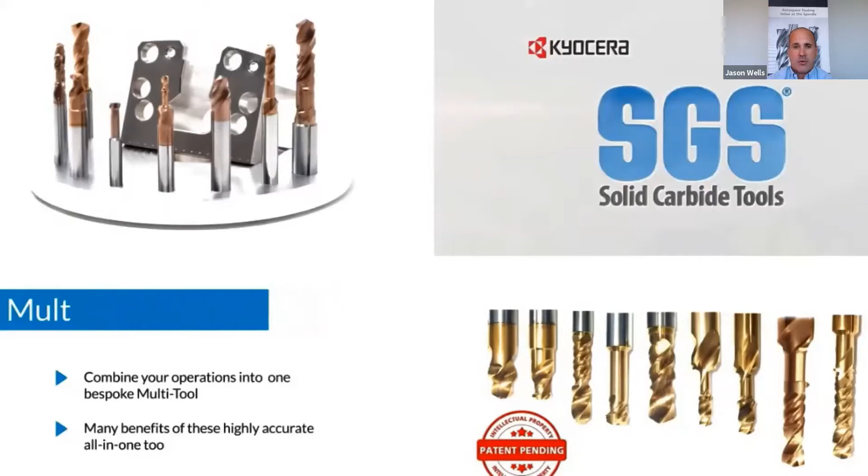What my division focuses on is special tools and engineered solutions. And the topic I'm going to talk about today is multi-operational tools or combination tools, where we try to really engineer a solution by combining multiple operations into one tool platform or one tool. I hope today to really enlighten you and help share some information on advantages this kind of strategy can bring to your operations. I'm going to break this topic down into 4 distinct areas.

The first thing I want to look at is it always comes down to dollars and cents. So we'll talk and discuss about the cost of machining so we can understand how combined tooling is going to influence that. We'll then look at machining a feature. What do we do? How do we approach it when we get an opportunity? And how do we decide if combination tooling is going to be ideal for us to pursue?

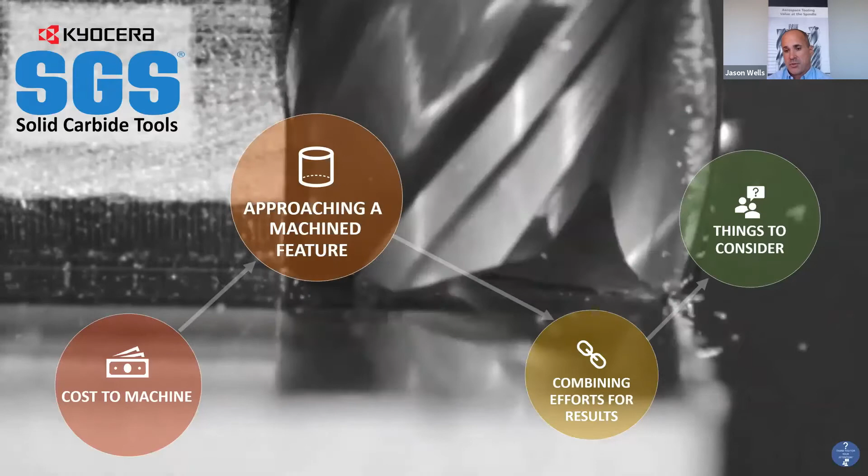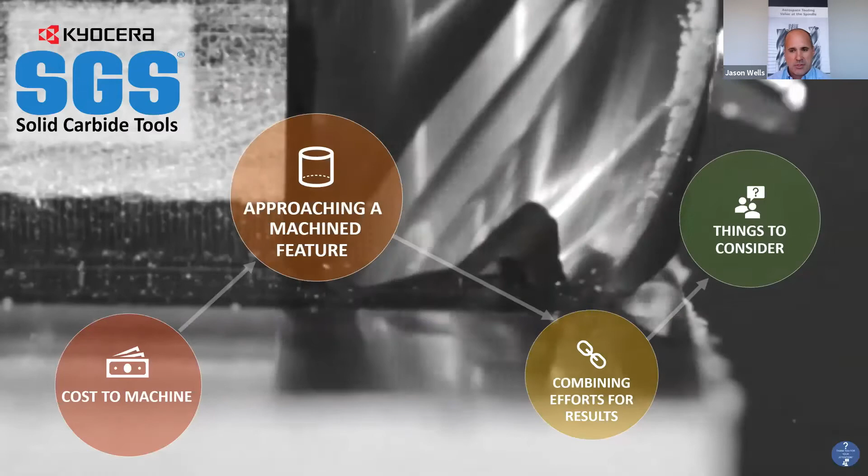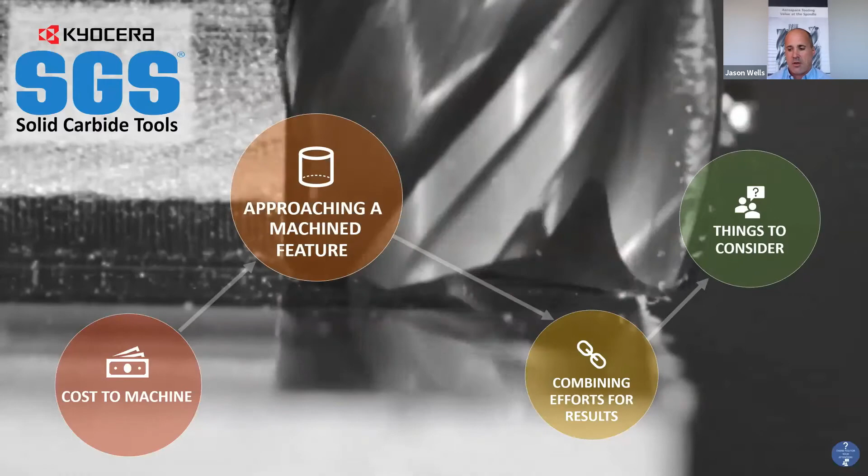Then we'll look at how, by combining some of those geometries into one tool platform or combining some efforts, we can maximize our yield and maximize our results. Finally, we'll talk about things to consider in deciding if we want to go the path of combined tooling. Obviously, this is going to really lean towards advantages in combined tooling, but I do want to emphasize at the end that it's not a cure-all for everything.

So let's first look at the cost of machining, and we'll break this down into really 3 areas. It's certainly all about the profits, but we'll look at how combined tooling can really help us seek out profits. What are those areas that it really addresses that helps us maximize our profits and maximize our yields? We'll then look at the cost of machining, the equation of the cost of machining and how that breaks down, and then how the tool itself can impact that cost equation.

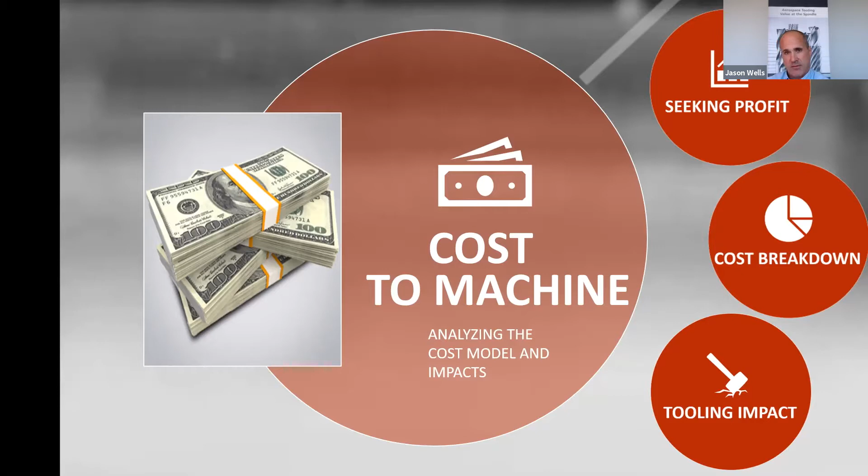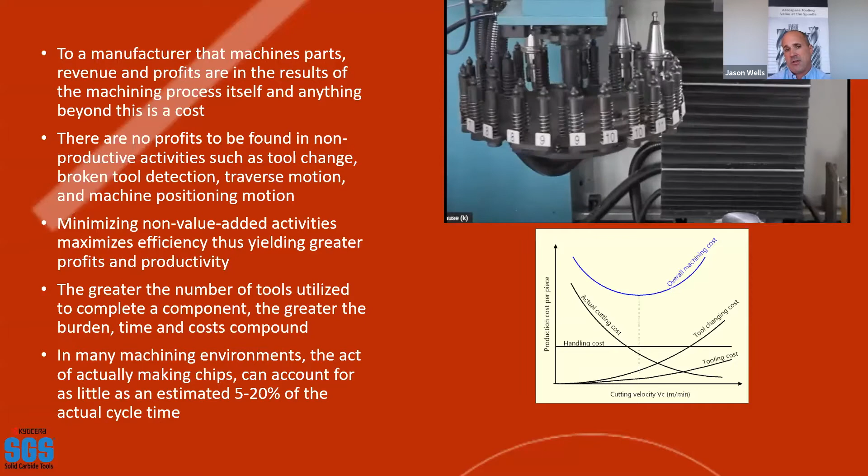So when we look at it from a profitability standpoint, the manufacturer of machine parts, it's all about the revenues and the profits, and that revenue and profit comes in that end product that we're manufacturing. Profits are made in the process itself, and anything outside of the manufacturing of that end component that we're going to sell to our customer is just a cost. There's really no profits to be found in any kind of non-productive activities.

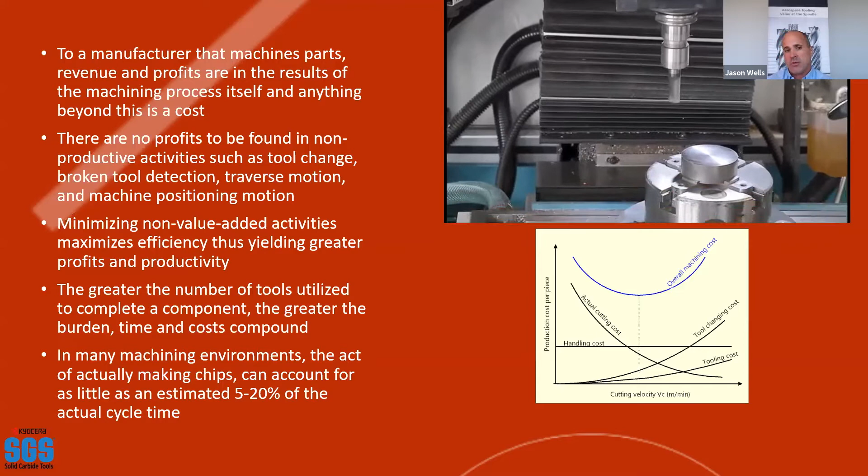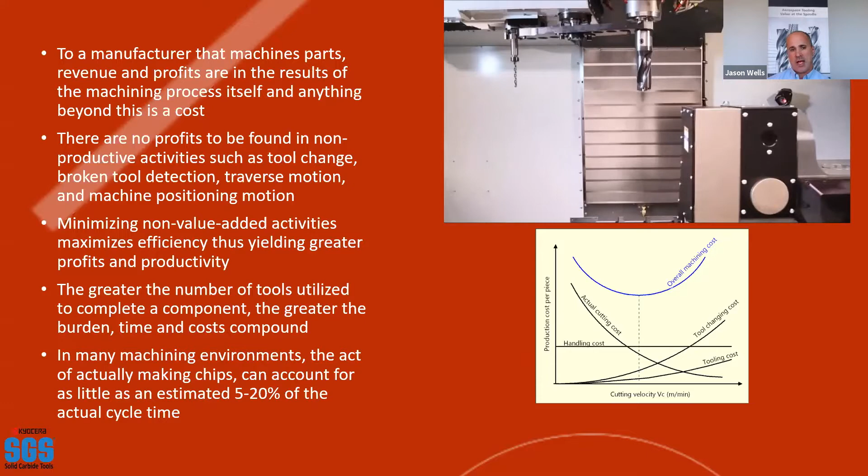This is really what we focus on a lot of our effort when we try to design solutions or engineer solutions is where can we really eliminate or minimize non-productive activity? What I mean by that is tool change time or detecting broken tools or probing cycles or just general traverse motion inside the machine. We want to minimize that activity so that we can maximize our yield in regards to profits and productivity. And what we find in a lot of applications is the greater the number of tools that we utilize, you can imagine that this just compounds the burdens and the cost and the time in that machining environment, thus compounding the cost of creating that component that's going to be then sold back to our customers.

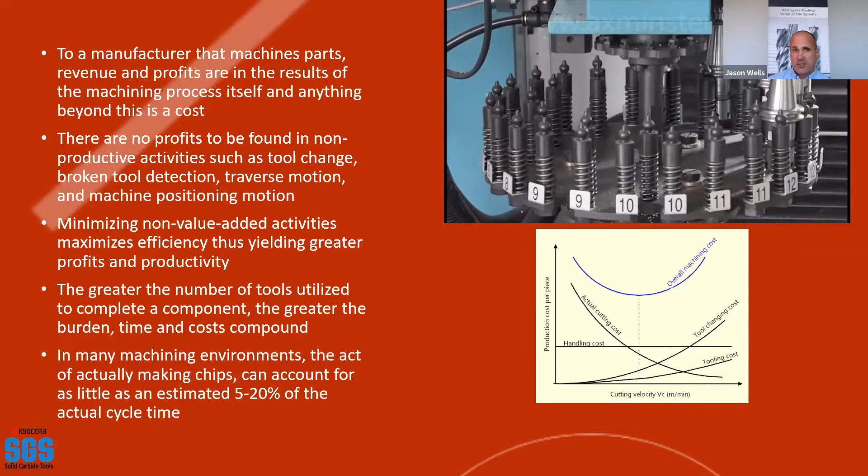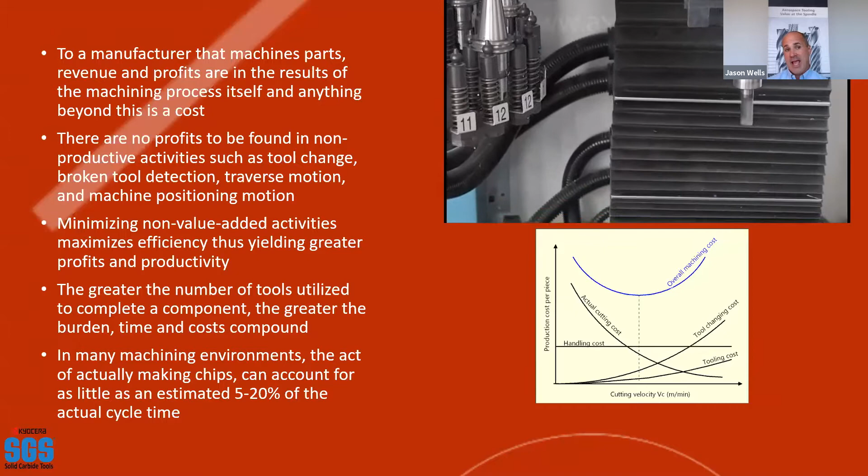In a lot of machining environments, the actual act of making chips or manufacturing that part can account for as little as 5 to 20% of the actual cycle time. So for us as tool manufacturers, that gives us anywhere from 80 to 95% of an area we can really focus a lot of attention on trying to reduce and have impact for our customers when it comes to developing solutions.

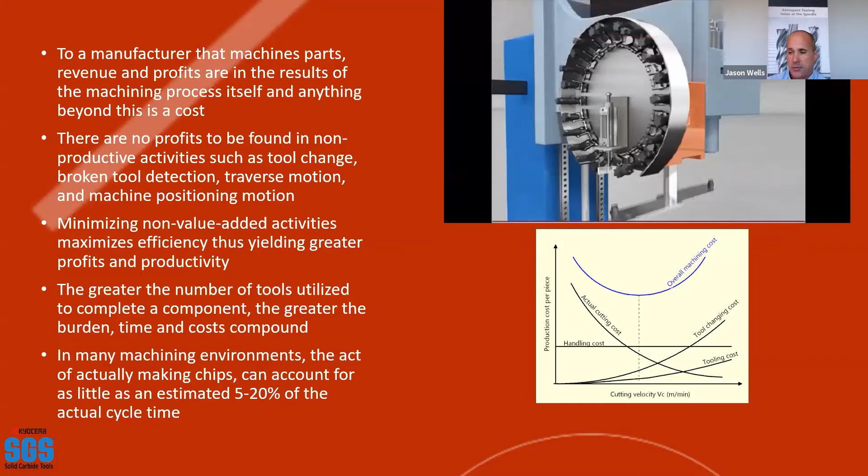The purpose of this presentation is really to share with you how the incorporation of combined tooling as a strategy can really impact your profitability, your throughput, and your efficiency gains.

What we find is, unfortunately, a lot of potential customers and end users want to shy away from combination tooling in their operations, a lot of times due to economic concerns. Combined tooling does fall into a category of special or custom tooling.

As I said in the very beginning, that's what my division focuses on, which is why I'm talking to you about this today - special tools, custom tools, or non-catalog product. And the truth of the matter is they do often have a higher upfront investment or a higher upfront cost for a lot of those special tools.

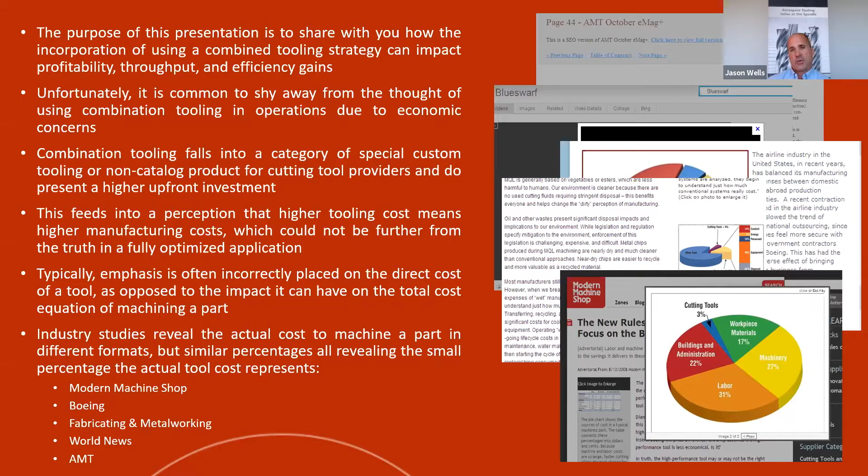Unfortunately, this feeds into a perception that higher tooling costs means higher manufacturing costs. Because tools are perishable in the equation and constantly being purchased and bought, there's this linear relationship in our mind that if I buy more tools, my manufacturing cost is obviously higher. And the reality of it is it's not that cut and dry, not that black and white or linear. In fact, in a fully optimized application, this couldn't be further from the truth.

So we get this incorrect emphasis placed on the direct cost of that tool equaling the cost of our machining process, as opposed to really focusing in on the impact that tool can have on the total cost equation of machining a part.

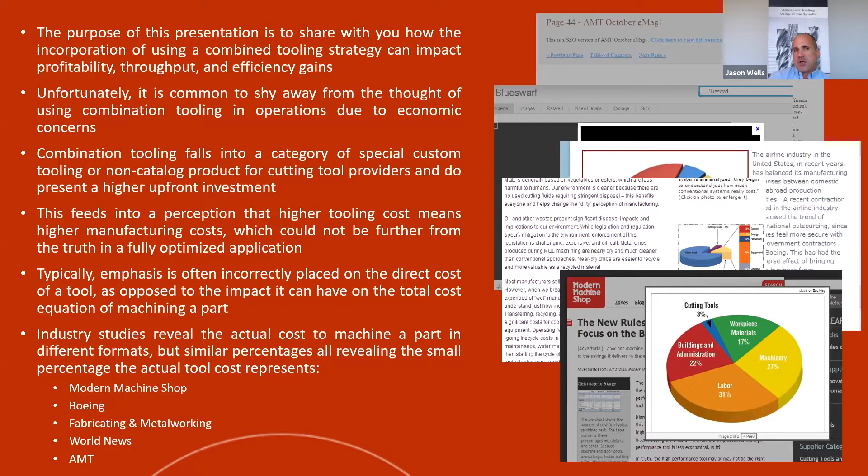There's been multiple studies - I'm sure many of you may have seen them throughout the course of your career and your travels and various trade periodicals - but definitely several industry studies that have revealed and shown the actual cost of machining a component, and they all kind of boil down to about the same equation. We've seen them in trade periodicals, and we've seen organizations like AMT and large companies like Boeing all do these analyses and basically come down to the same end result.

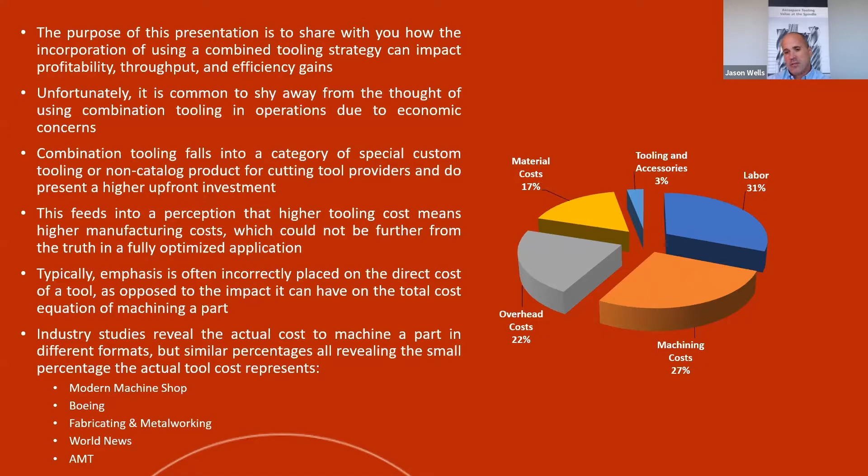This kind of breaks down what we see typically in the machining equation. As you can see, that tooling section of the cost equation, or this cost pie, is the smallest component or the smallest piece of the overall cost of machining a part. I'm sure many of you are familiar with this, but I just want to emphasize this as it pertains very much so to this particular conversation.

So let's look at the tooling impact. Every function that goes on inside of a facility is really geared around trying to get that end product, that product we're selling to a customer, out the back door so that we can get compensated for that work. But every function is dynamic and it's connected, and every function has a cost associated with it as well.

So anywhere where we can produce a savings in that chain of events of creating a product from a quote to a finished product that we're receiving a check for, those savings have a ripple effect back through the whole series of costs associated with our manufacturing and our operations. So let's take a look at the tool, for example.

Our tool can have a massive impact on things like our labor costs. How many times does a tool crib attendant have to possibly touch it or set it? The machinist - how much does he have to finagle with it? The programmer, quality assurance people - those are all touch points that the performance of that tool can have an impact on.

Machining costs are very obvious - tool change time, those unproductive times that we talked about, positioning moves, fixturing costs, our burdens, our overheads, how many tools do we have to inventory, shipping and receiving folks, purchasing activities, capacity, energy consumption, and then finally material - things like scrap, material removal rates.

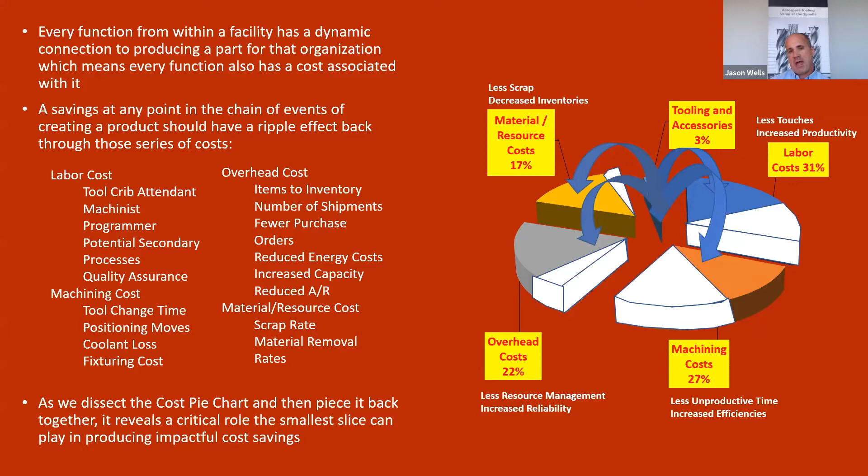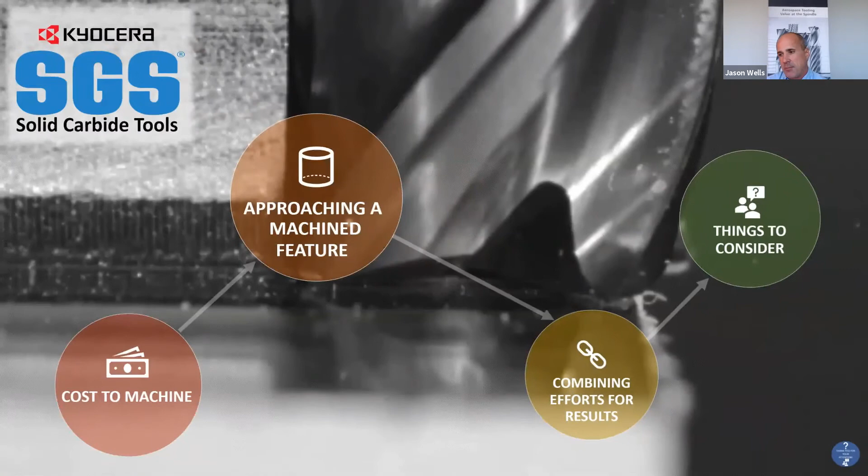So let's take a look at a machining feature, and let's talk about it a little bit. So we get this opportunity to create a component. We look at it feature by feature. We approach that application, and then we define a process around it, and then we talk about our times.

Thinking in a very conventional, straightforward fashion, we start thinking, well, I've got to obtain a tool to create the hole. The hole has a surface finish on it, so I got to make sure I create that finish. I got to create the top chamfer and the back chamfer. As we dissect that and walk through it in our minds, it's very common and easy to just follow the obvious path of, I need a tool to do this, I need a tool to do that, and just kind of step through it step by step, process by process, addressing each individual geometry of that feature as opposed to the feature as a whole.

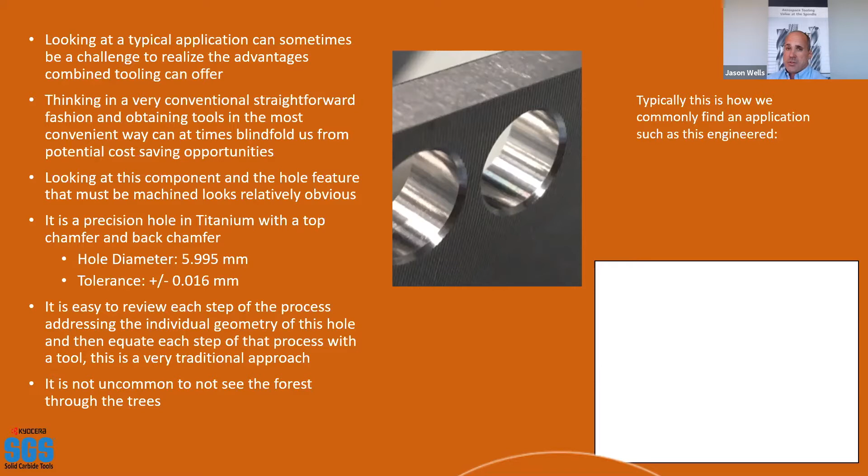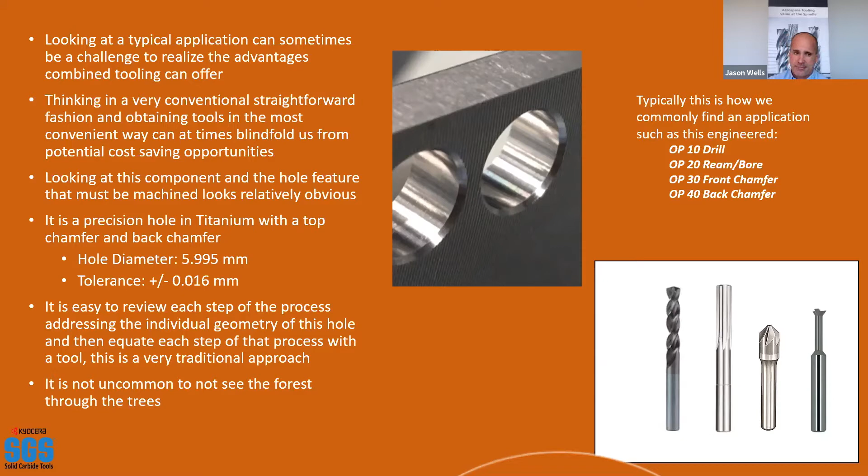It's not uncommon for us to not be able to see the forest through the trees. Again, I want to emphasize that this is a very typical, real world situation that we run into. So we could see, just to create this one feature, where we would drill it, potentially ream it, bore it to get the finish and the size that we need, a tool for the top chamfer, a tool for the back chamfer. A very common way to process this particular application.

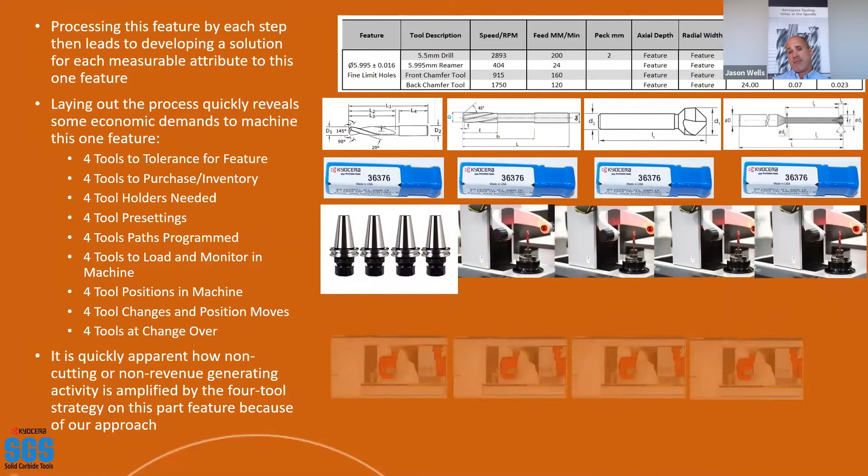So as we kind of dissect it that way and we start laying it out and putting it feature by feature, now all of a sudden we have to address each one of those pieces of each attribute or each piece of geometry within that feature.

So we create our process sheet, we figure all that out, and now all of a sudden we start laying it out and realize we've got 4 tools. We have 4 tools that we have to source. We have 4 tools that we have to make sure that tolerances are cohesive with each other and going to work well together. We have 4 tools to purchase, 4 tools of inventory, 4 tool holders to hold these tools, 4 tools to set, 4 tools to program, 4 tools to monitor tool life, performance, get the right balance of speeds and feeds. We take up 4 positions in our automatic tool changer.

We have 4 changes, position moves within the machine environment itself. And then finally, it's 4 tools for our operators, our machinists to set and to handle inside that machine environment itself. So as we kind of break it down and lay it out and visually look at it in that perspective, it quickly becomes apparent how all these non-cutting or non-revenue generating activities get amplified or multiplied as we add tools to the application, add tools to the scenario to machine this particular feature on this part.

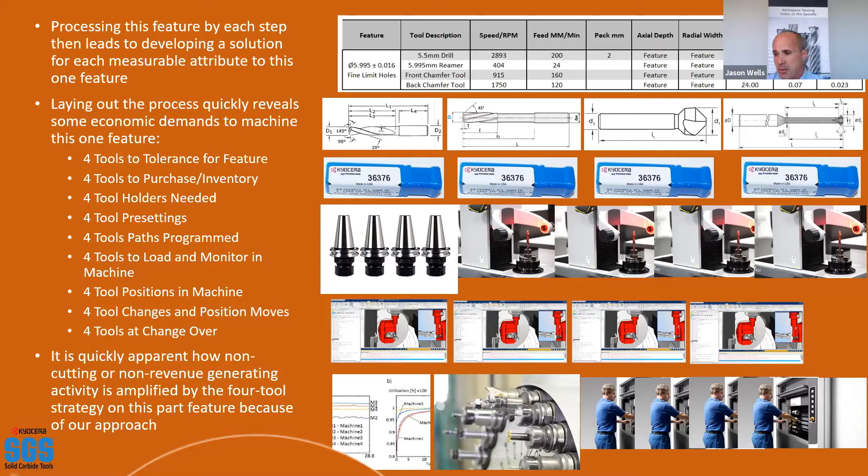So beyond the obvious cost to support 4 tools, all the resources that are going to be needed to support those 4 tools, we also have to look at it from a time standpoint. So each one of these tools has got to be able to move into position to remove their small piece of material or their small feature, their small piece of geometry within that one feature.

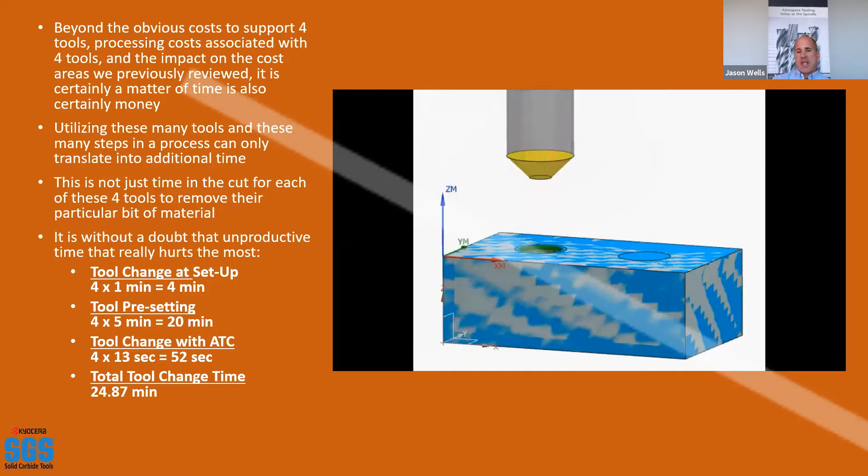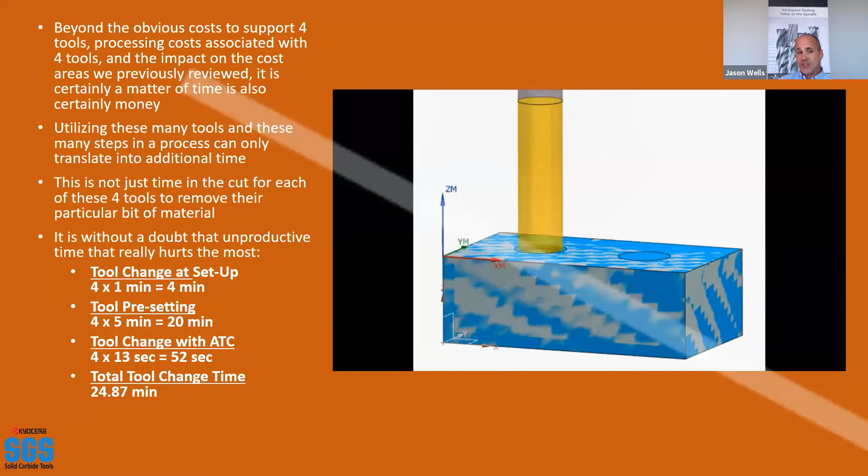So as you look at it here in this simulation, as you can see on this particular slide, as we add tools to the steps or add tools and steps to the process, it's only natural that that translates out into time. It's not just the time of actually cutting and removing material, it's all that other motion that we really want to try to eliminate and get out of the way. Again, that 80 to 95% that we really want to focus in on.

So just talking about getting the tools to the workpiece before we even actually remove material, we can see a lot of time, and how it multiplies as we add more tools into the application. For example, let's say just to swap out the tools, it's a shift change and your operator, your machinist has to take the used tools out and put new tools into your ATC, your automatic tool changer. Let's just say it takes 1 minute to do that, times 4, now you've got 4 minutes.

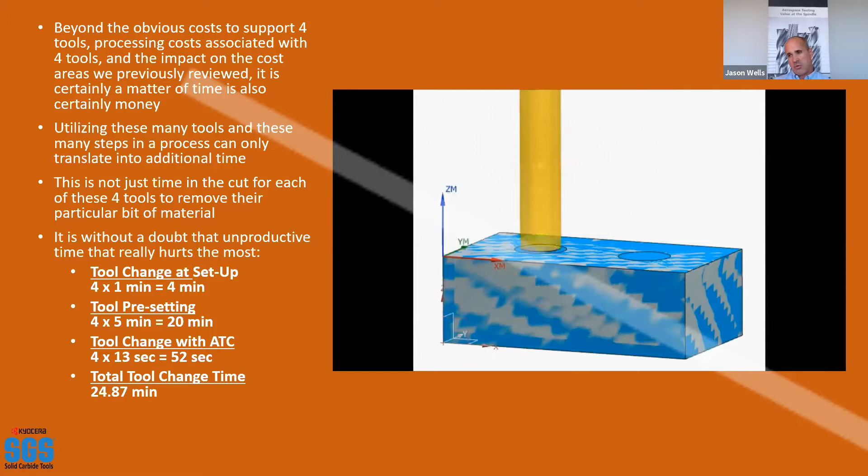Then you got to take those used tools out, put new tools into holders, set them, measure them in the presetter, set everything the way it's supposed to be set so it's ready to go back into the machine. Say 5 minutes per tool, multiply by 4, now we're looking at 20 minutes. Then inside the machine itself, moving into position and swapping out in the automatic tool changer, let's say 13 seconds per tool. So when we add all that up and it compounds, we've got nearly 25 minutes of touching, managing, messing with that tool just to get each one up to the workpiece to do what it's supposed to do from a metal cutting perspective.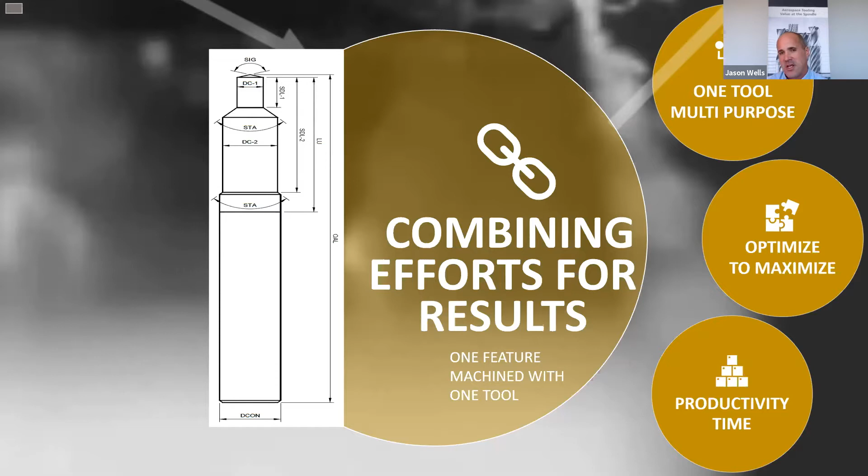So let's look at how we might be able to gain some efficiency. Let's talk about how we might grow a better strategy by using a Swiss Army knife approach of one tool with multiple purposes, how that may optimize to help us maximize our yields, and how that's going to impact our productivity and our time.

So one of the ways here, or to potentially work with our end customers, is we try to start sometimes looking at the whole or the feature from a different angle or a different perspective.

What I mean by this is sometimes we start with what's the end goal and work our way backwards. I like to use the analogy of proofreading a paper. You can write something and read it a million times the same way and your brain skips over mistakes. All of a sudden, if you change the way you read it, even the setting you're reading it in, or read it backwards, or skip around on pages, errors start to jump out at you.

It's the same with the application. Sometimes we have to look at it totally differently and force ourselves to find a better path of profitability.

One of the ways we start off on whether we want to consider combination tools is when we're given an application where it's one feature. Like I said before, that was just one hole. Yes, it had chamfers, but those chamfers were part of that one feature. So if one feature is being addressed by multiple tools, that's usually a really good starting point for us to ask: it's one feature, can we do it with one tool?

That's kind of the approach we try to wrap our minds around as we start going down that path. It's not as if we were drilling the hole over here and creating chamfers on a whole other part position. It was all congruent, all geometry that flowed together. So there should be a way we can approach that with a one-tool strategy.

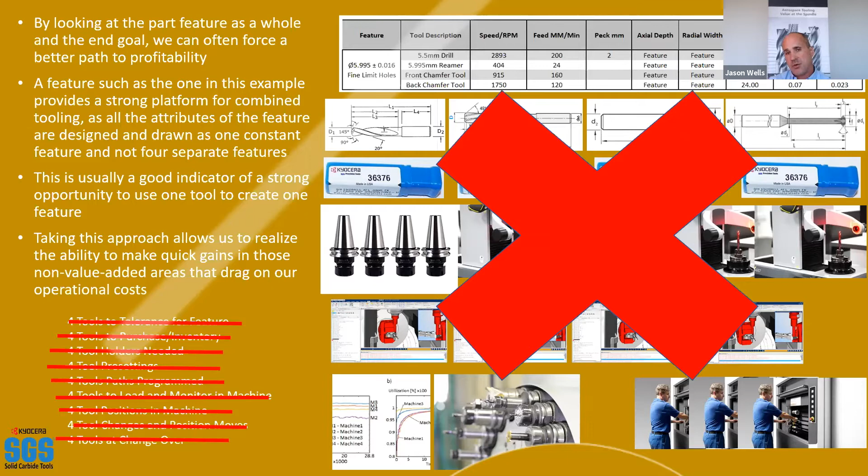Then as we start to look at it, if we can do this with one tool, how's that going to impact our non-value-added activities, those activities that really drag on the operational costs of our business? You can see on this screen the original quick-gut, traditional, conventional approach, but that's not the way we want to go. You can see how much was involved with that.

Now let's look at doing that one feature with one tool. It's going to create those 4 aspects of geometry. We're going to create the hole, finish it to size and surface finish requirements, create that top chamfer and that bottom chamfer, but do it all together, all as one.

So what that does is give us the opportunity to have one tool to tolerance, one tool to worry about how the tolerances all fit together, one tool to purchase and inventory, one holder, one tool to preset, one tool to program, one tool to monitor for loads and forces, one position in our automatic tool changer, which is great for any kind of lights-out operation, one tool that has to position itself and move within the machining environment, and finally one tool for our machinists and operators to manage right there at the machine.

So just saying it out loud, just seeing it on paper, you can see the amount of variables we've removed that could potentially go wrong in a series of events by trying to condense it down into a combination tool strategy.

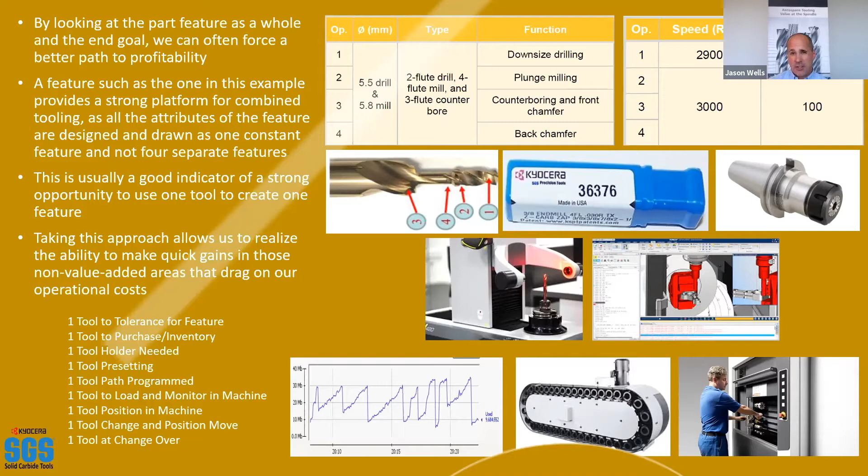So now that we realize all these other costs and the impact, and how we can really streamline touches as something moves through our facility, and the different points that have the potential for cost savings to ripple back through by minimizing those touches and that motion.

Let's really look at it from a capacity perspective, because it's not just the standpoint of what's happening offline outside the machine, but also what's really happening in the machine. So we have one tool that's able to create all those features, all that geometry together in one motion inside that machine. Now all of a sudden we gain capacity, we gain time, and we minimize and start to have a massive impact on that non-cutting, non-productive motion going on inside of our machining environment.

These gains are incredibly valuable, more valuable to us in many ways than just not having to buy 4 tool holders or set 4 tools offline, because now we've gained the ability to take on more work. We've gained the ability to quote more aggressively on some lead times and things of that nature. So it becomes a lot more about working smarter, not so much as working harder.

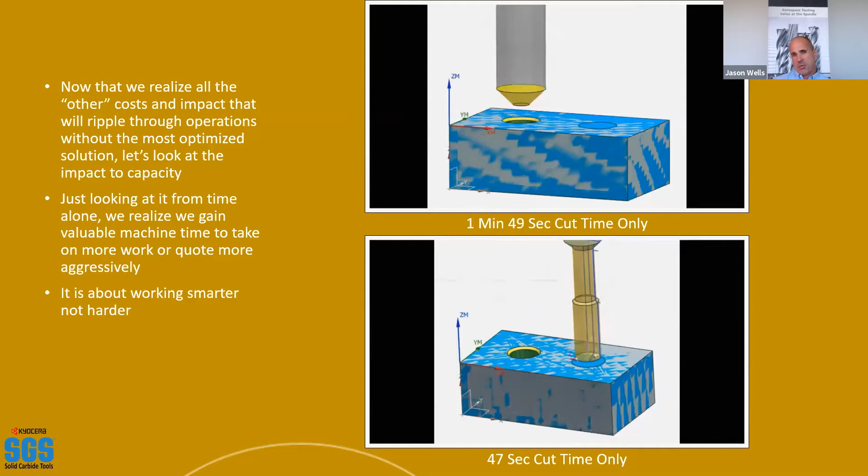We get into a lot of situations, and I'll show you some later on, where customers call us in and really all they want to do is speed up what they've already had, and we're able to re-engineer and reapproach so that we can try to approach things a little bit smarter to try to maximize those savings.

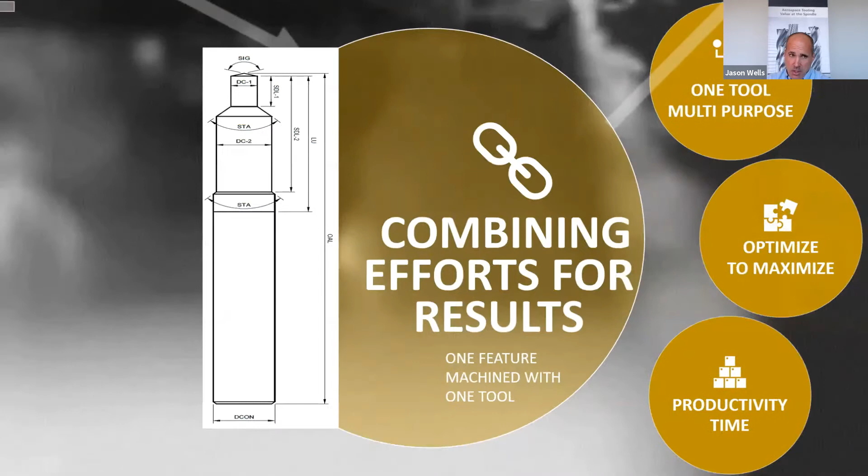So as I mentioned before, this is not a made-up scenario. This is a real-world situation, and it's not an uncommon one either. You saw the simulations in the previous slides. Now I want to show you actual video of a tool similar to this concept that we've talked about in action.

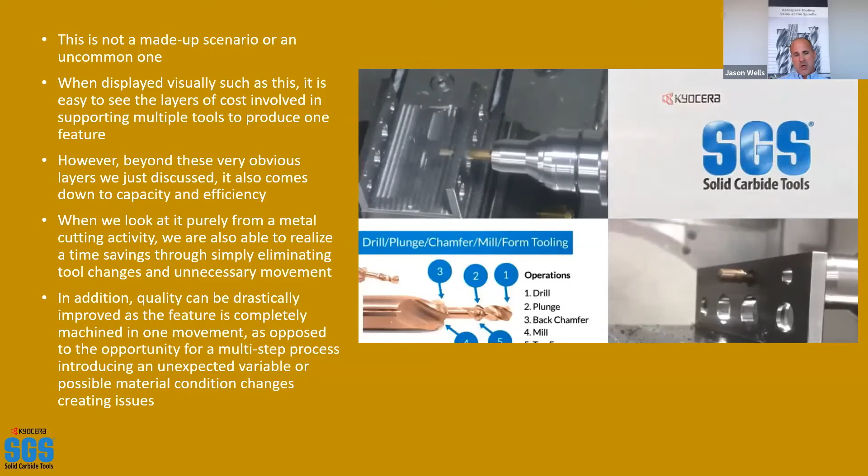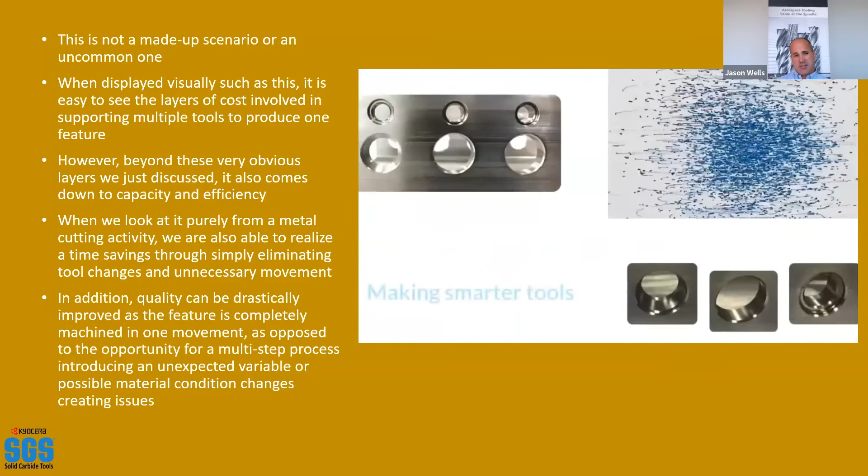So when we display it visually, you can see the layers of costs that are involved in supporting multiple tools. We saw the layers and all the touches with all the holders and the inventory and the purchase orders to get all 4 of those tools together, and all the space and touches. But beyond these obvious layers that we've discussed, the real impact comes down into capacity and efficiency, gaining that capacity to take on more work, gaining efficiencies to grow your profitability.

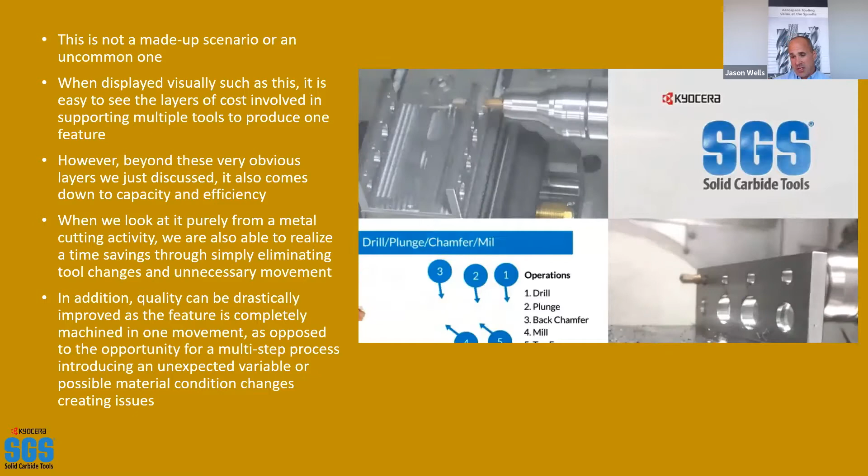If we look at it purely from the metal cutting activity itself, not talking about all the other outside peripherals, we realize tremendous cost savings, again attacking that 80 to 95% of non-cutting activity that's estimated to happen inside that machining environment with unnecessary movement and tool changes and things of that nature. So as you can see from this video, the feasibility of this, but also by combining those operations, not just the feasibility of that one feature, but being able to do potentially multiple features.

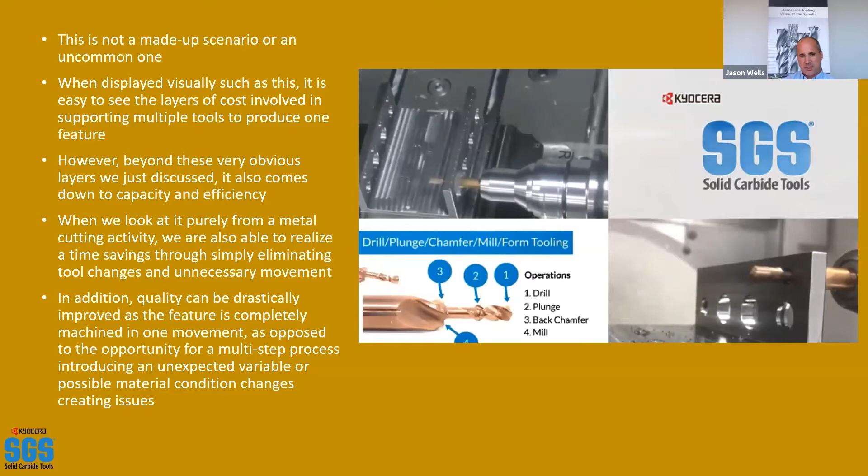One aspect that also is nice with combination tooling that I'd like to mention is quality aspects or quality opportunities to help drastically improve certain situations where we may have complex features with tight dimensional tolerances. There's an opportunity there for us as tool makers to do all the heavy lifting for you and put it into the tool geometry itself.

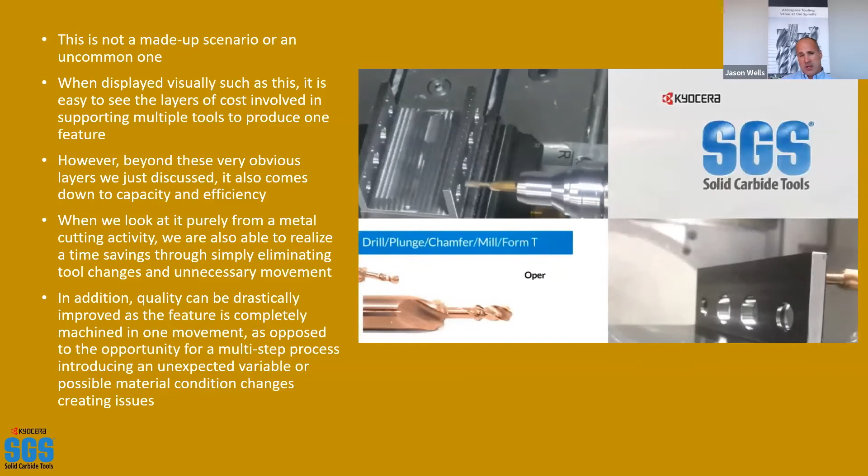Also, with a multi-step or multi-tool operation, we have to worry about sizing tools that follow other tools. We have to make sure we're leaving enough material, not too much material, and whether we've changed the condition of the material for the tool that's going to follow. These are all variables that we're layering into the application, and these are all points that could potentially go drastically wrong for us, unfortunately.

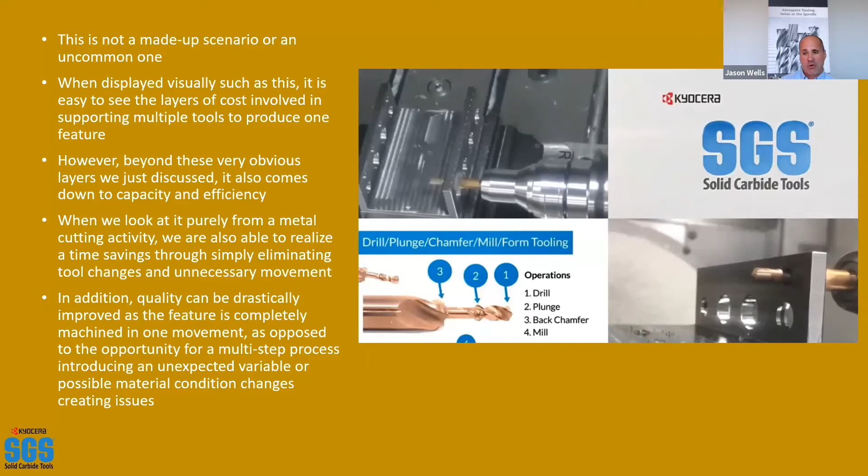So, as I mentioned earlier, the tooling is the perishable part of this equation. It is why it gets a lot of attention and is a focal point when it comes to machining costs. Hopefully what you're seeing now through some of the slides that have built us up to this point is that it's definitely more complex than that, more layered than that. I think only equating my cost of machine to the tool is very one-dimensional, and it's much more dynamic, much more complex than that.

To try to help further this point, I wanted to put it really into numbers, into dollars and cents, because at the end of the day, that's what we're striving for: that profitability, that ability for us to grow our businesses and supply our customers.

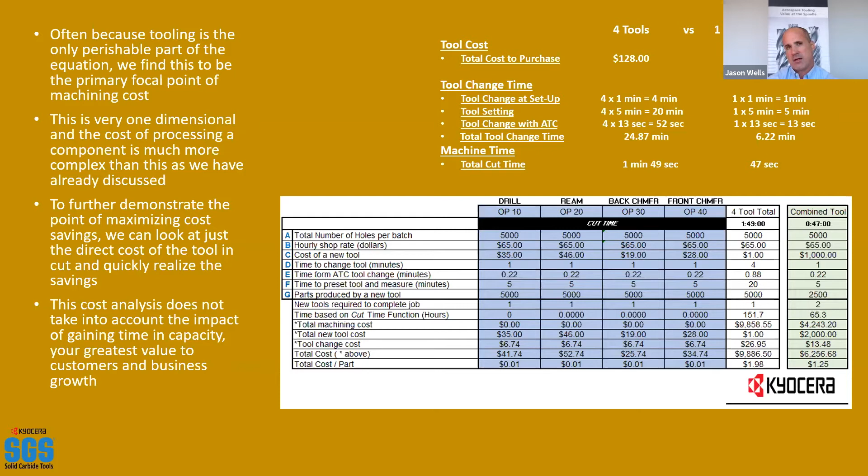One thing I want to point out, and one reason I added this ridiculous scenario, is to show the impact that just saving or going cheap on tools really has on your bottom line. We took $127 off that 4-tool cost—from $128 down to $1—and it only attributed to a 2 cent per part cost savings on the bottom line. So the math reveals what a small piece of the cost equation to machining the tool really contributes.

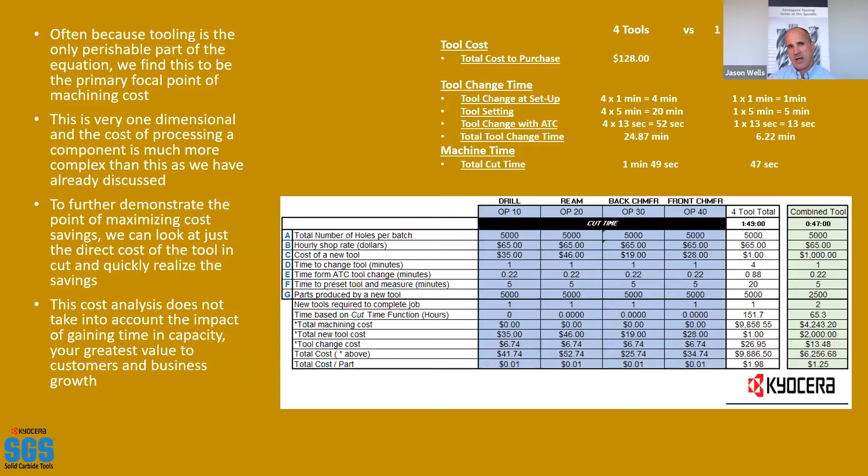That's why it's really important that we try not to get too tied up in the cost of the perishable as it relates to our cost savings.

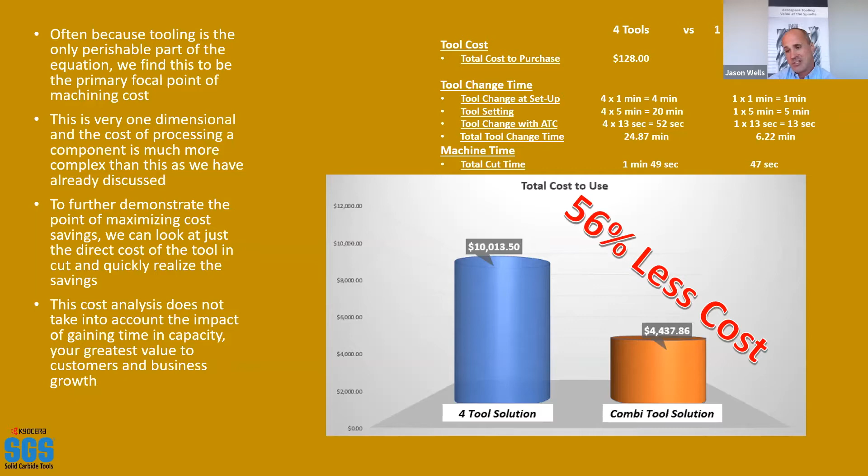In our application with our customer, when we came in at 5,000 hole usage, the cost to use the 4 different tool strategy was just north of $10,000. When we were able to plug in the combination tool and address that whole feature with 1 tool in a very consistent motion, we were able to drive that cost down to less than $4,500—basically creating a 56% cost savings, or 56% less cost.

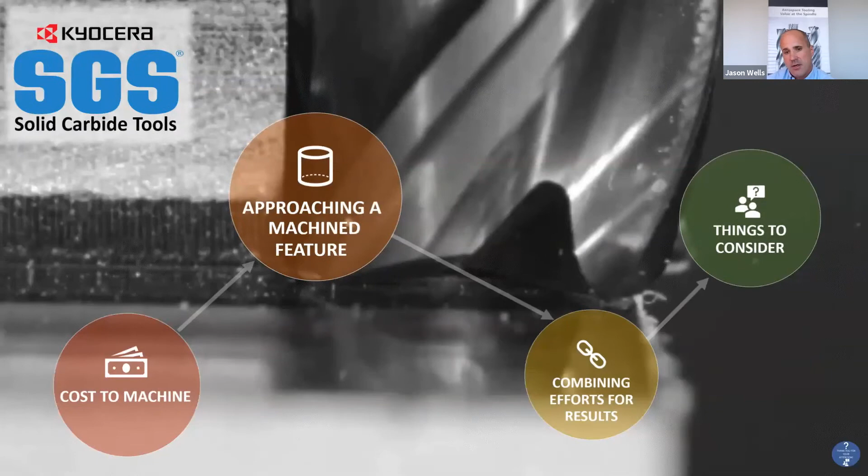Let's talk about some things to consider when we want to move towards combination tooling. The first thing I want to do is share some further application examples. We went through a very simple but powerful example, and I hope you found it's not always obvious that this is a great opportunity to use a combination tool. But I want to show you other applications our company has gotten involved in to really combine operations into one tool, bringing real savings and real impact for customers.

This first example is a grooving tool. This was a customer performing a product on a lathe where they were drilling and then turning a series of internal O-ring grooves into a component. They called us in to help with the drilling cycle, but when we got in there, we found there might be other opportunities.

As we looked at ways to engineer this product, we thought about a whole different way of looking at it from a milling perspective. Rather than doing all this work on a lathe, we put it in a mill, put all those O-ring grooves and that form into a milling cutter, and interpolated the internal features in one motion. This was a massive savings for this customer, who had added a half shift to keep up with demand. We eliminated that half shift and opened up capacity, removing a major bottleneck.

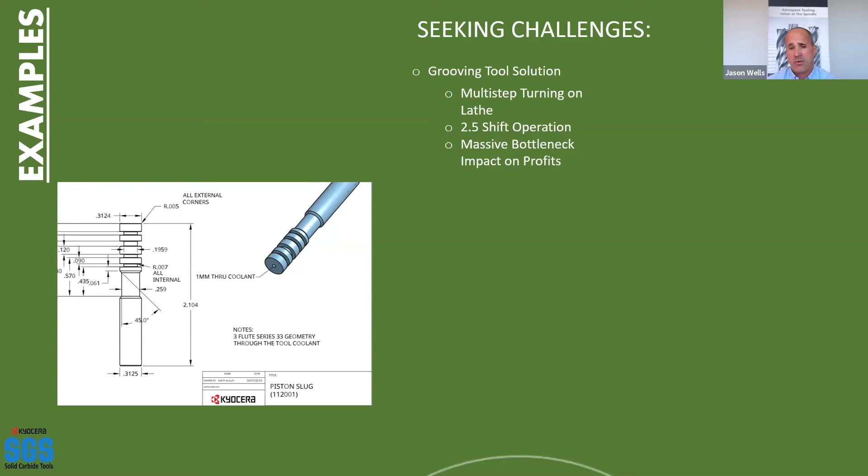In this example, the customer came to us basically asking us to quote what they already had, hoping we'd quote it cheaper and deliver faster. The truth is, we could maybe price those tools cheaper, but that would only have minimal impact, only addressing that 3% portion of the cost equation if all we did was replace brand A with brand B.

So we asked if we could get involved with the project and learn more about it. What we found was that this customer was creating a series of timing teeth. They were using a tool to rough these slots, then coming back with another tool to finish them out and size them, and then using a third tool to radius the top of these teeth.

We looked at the application, used a little bit of a different programming strategy, and were able to rough, finish, and create that top radius all in one motion. We took their cycle time from 30 minutes per part down to 1 minute and 30 seconds per part, a 95% reduction in their cycle time.

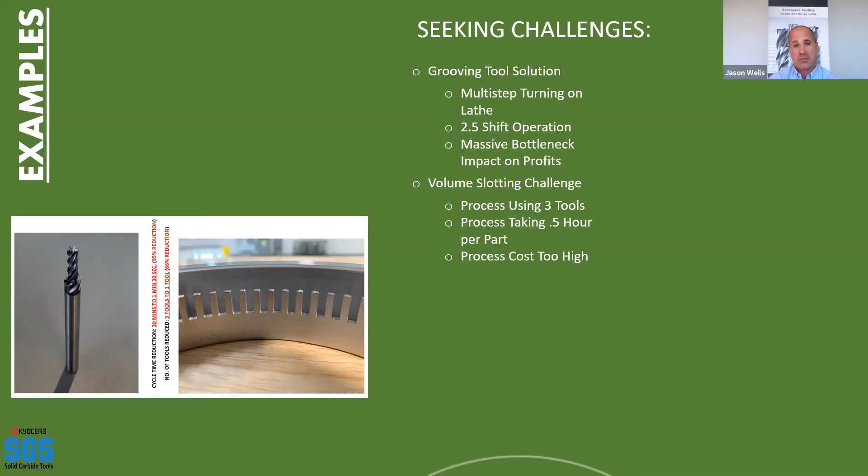So we did a great job of addressing that 80 to 95% I was talking about earlier in that first slide, and obviously reduced their tooling, the amount they had to handle, inventory, and put into tool holders, by 66%.

This was an application where a customer was creating seats, almost like counterbores, with an end mill, then coming back in with a drill to create a hole in the bottom. We got involved because they needed to gain time. They were at risk of losing the job due to cost and delivery issues, and they were also having quality issues with the hole positioning at the bottom and some burr issues.

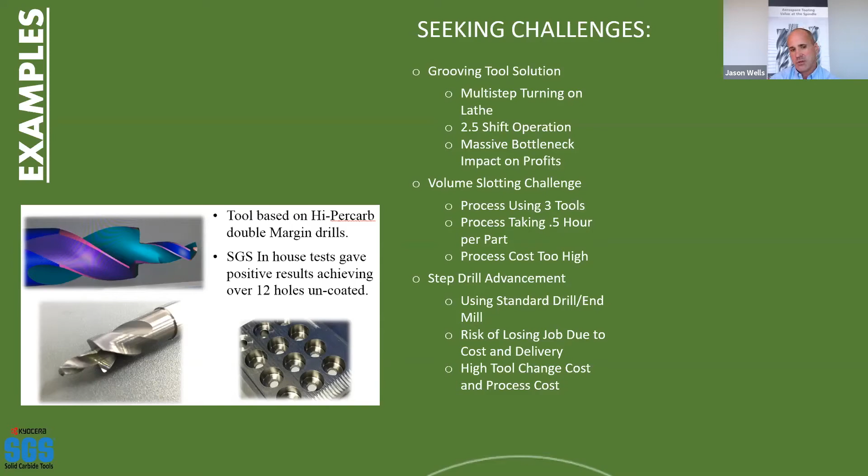Our field engineer was able to get involved, look at the application, and realize we could possibly combine this. This was one feature with different pieces of geometry, but again, going from that whole mindset of one feature, one tool, we were able to create the whole geometry consistently, drastically improving the positioning quality issues and concerns, and address that whole application in one motion.

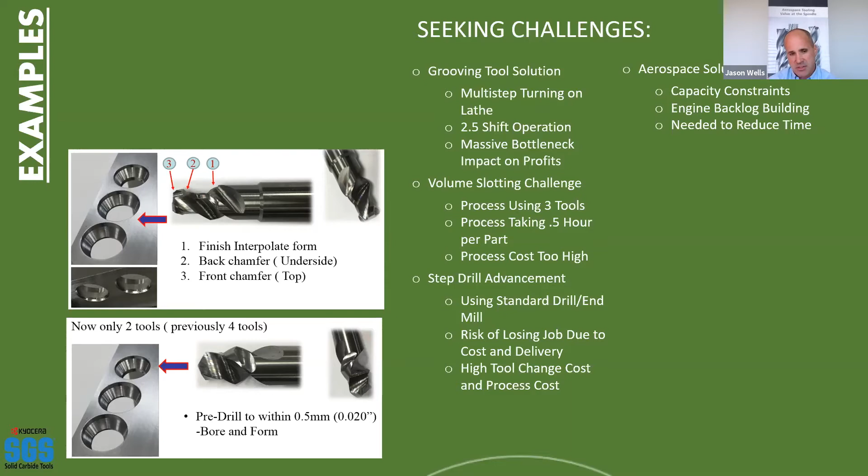This was an aerospace application where the customer was trying to create a hole that had features on top and on the bottom, and also had a form that blended into the top and bottom features. We did try our best to get this into a one-tool platform, but this is where you really have to use the right strategy and make sure you're not trying to do too much with one tool. We ended up having to back off a little, but we were able to take it from 4 tools down to 2 tools. The one thing you have to be cautious of is that trying to do too much with one geometry can cause a quality issue in certain aspects of that feature, so a proper strategy has to be planned out.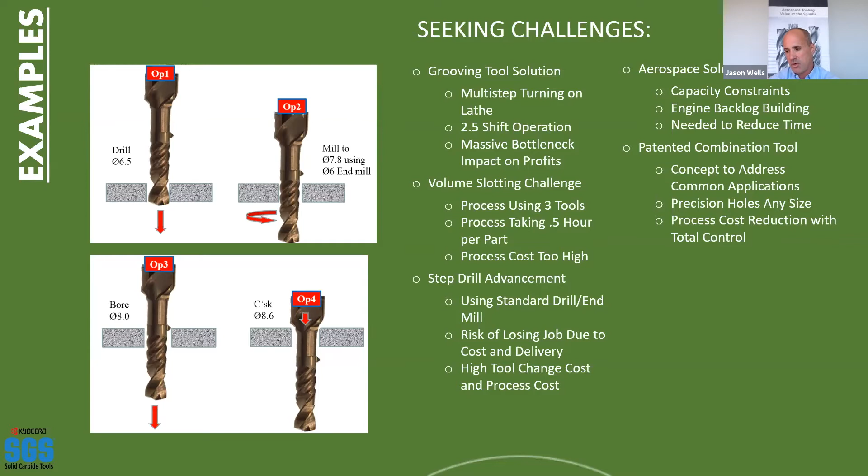This is a great unique tool we're really proud of that our colleagues in the UK developed. We have a tech hub, similar to ourselves, that services Europe out of the UK. It's called KYOCERA SGS Precision Tools Europe. They do a lot of special tools, combination tools, with a highly skilled staff that gets involved in a lot of solution sales. In the process of doing that, they developed this particular tool. We are pursuing patent rights on this concept, but basically this tool will drill, then interpolate mill to size, then precision bore the hole, and finally create a countersink on the top surface. It allows you to create a lot of different sized holes and gives you some process control on precision holes. Our hope is that this tool really allows us to start gravitating combination strategies closer to a standard product mindset. Our UK staff did a phenomenal job on a really clever design we're proud of.

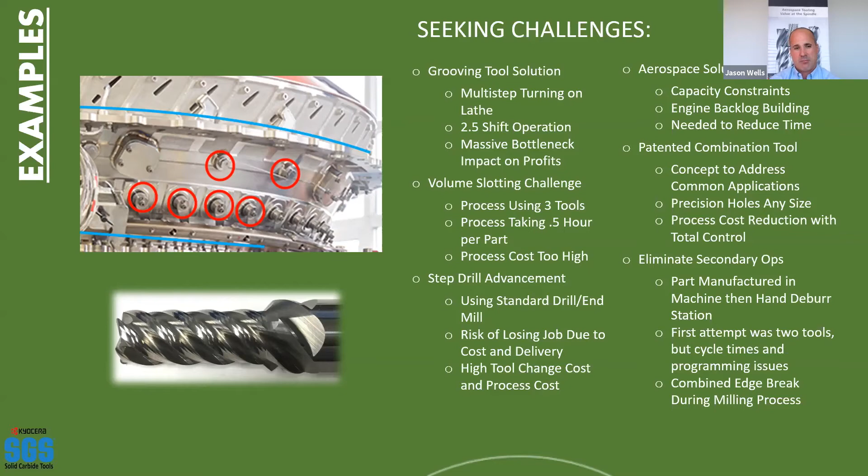This is an application where a customer was machining parts, and the part after machining had to have an edge break or burr removal, which was being done offline in a secondary operation. The customer first tried to do it in the machine itself with 2 different tools, which added a lot of additional probing cycles and time. They were having programming match issues, so they abandoned that strategy and went back to secondary ops. Our field engineer, again on a UK application, was able to see this as an opportunity to work with our manufacturing folks to develop a product that could mill and break that top edge at the same time.

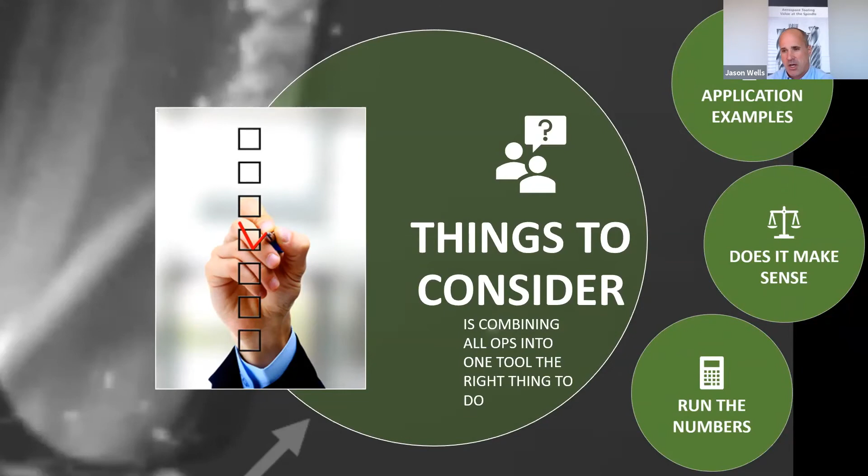So those are just some examples of really pushing, thinking outside the box, looking at things a little differently. But does it make sense to use combination tools? This is where we really have to ask ourselves and dig into the challenges within the application environment.

In machining, we're playing this game of compromise, trying to address whatever the weakest link or weakest portion of the application is, and we have to work around that. It's the same with our strategy on combination tools, that combination tool is only going to function as well as the weakest aspect of geometry within that tool. Whatever the most vulnerable piece of geometry is will ultimately dictate the tool life of that combination tool. So we have to make sure we're getting the proper balance of performance and tool life for our customer, and not trying to do too much with one tool.

A lot of times, as you've seen in the pictures and various slides I've shown so far, we have to sometimes extend the length of the tool out in order to get pieces of geometry or aspects of functionality along that tool. When we do that, sometimes we can run into reach issues when trying to use combination tooling, where we might be restricted by fixturing. You saw some of the tools where we had to reach down below the part, and sometimes we don't have enough travel to get below or beneath the part.

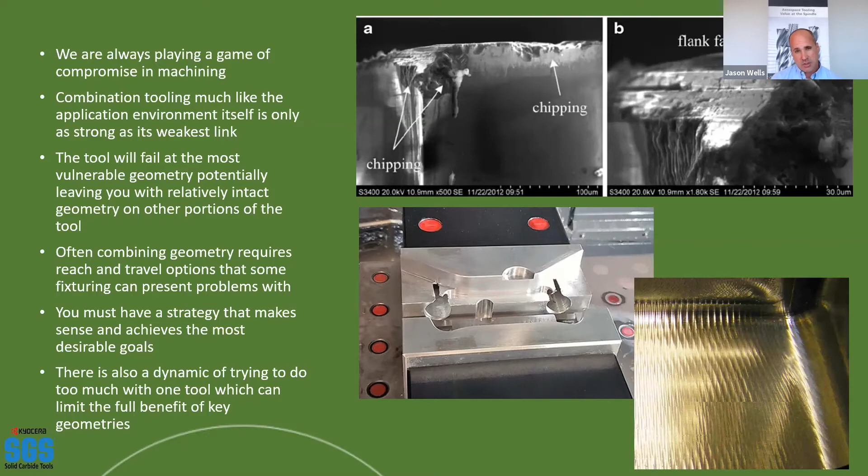Another situation to consider is, as you saw on some of those combination tools, we have to create some necks or thin cross sections to accommodate pass-throughs or going around certain features, and sometimes this can affect the rigidity of that tool. So we have to be cautious that we're not getting too thin or too long, that we're not going to run into a deflection issue that might translate into surface finish issues or tolerancing problems. So as dynamic as the environment is, we have to make sure we're accommodating those various challenges and variables in the most intelligent way possible, to take full benefit of the balance we're trying to seek, and not put too much into one particular tool.

The other thing too is it always boils down to economics. We do find that combination tooling lends itself better to volume-driven manufacturing, where there's a standardized, regular flow of components always coming through a facility. It becomes a little more challenging in a prototype or R&D shop, but if we have standard components with features we can address with combination tooling, we can really reap large cost savings in those environments.

The other thing is try to keep combination tooling in mind as an option. Where I've seen it work in R&D or prototype shops is where a part has features that are fairly complex and blend together with tight tolerances—where you may have an angle running into a radius, running into a diameter change, into another radius, and so on. When all those geometries need to flow together in a very tight and controlled fashion, that's where combination tooling can solve a lot of problems for potential customers.

Because that puts all the burden on us as tool makers, all the weight on our shoulders to make sure we're tolerancing, grinding, and manufacturing those tools within the needs that translate onto the workpiece surface. And although I did mention thinking of things as one feature, one tool—that's a great launching pad—don't limit yourself too much, don't get too much into a box. Hopefully the underlying theme here is thinking outside the box.

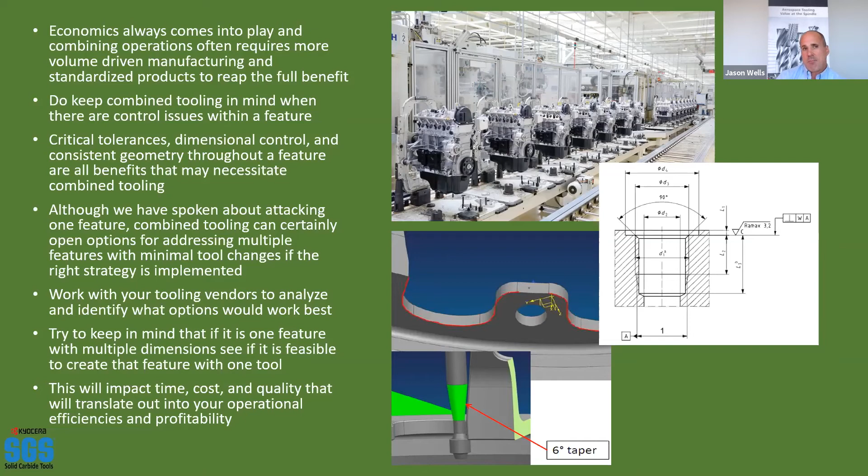So again, try to keep in mind: one feature, even though it may have multiple dimensions, is it feasible to do it with one tool? Ultimately, what we're trying to do is take that tool and have the greatest impact in your application environment on time, cost, and quality. And if we do our job right, that translates into the operational efficiencies and profitability your organization is hopefully seeking.

It could still be usable, but because one portion of that combined geometry has extinguished itself, the tool as a whole can't be utilized any further.

We do have another question here. Does trying to combine several operations onto one tool limit you as a tool maker with geometry options? That's a good question. Not as much as it used to.

Having been in this business since the late '80s, it's amazing how far technology has come, not just in our world but in our industries. So we do have the ability to do way more than we ever did. We have the ability to really dissect our grinding programs and really individualize them way better than we ever were able to in the past.

However, we do run into situations sometimes where by combining a lot of geometry onto one tool platform, we're not able to get as creative or as extreme on some of our geometries as we may be if we broke each of those geometries out individually.

For example, in the tooling industry, a real big buzz, and one of the things we at SGS are very well known for as the people that brought it to the market, is variable geometry end mills—varying that geometry in order to counteract some of the harmonics that happen in the machining environment. And when you're trying to combine a bunch of geometries, sometimes you have a limit on just how extreme you can go with some of those strategies.